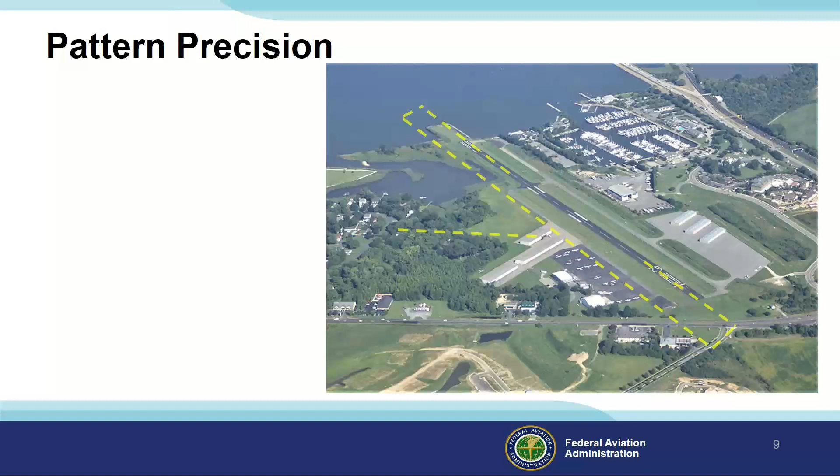So we're all familiar with the traffic pattern. This may not be exactly what it looks like, but represents the rectangular pattern that we usually end up using. It's an essential part of every flight, and sometimes what we do is we take just something as routine as the traffic pattern for granted. We don't want to be doing that.

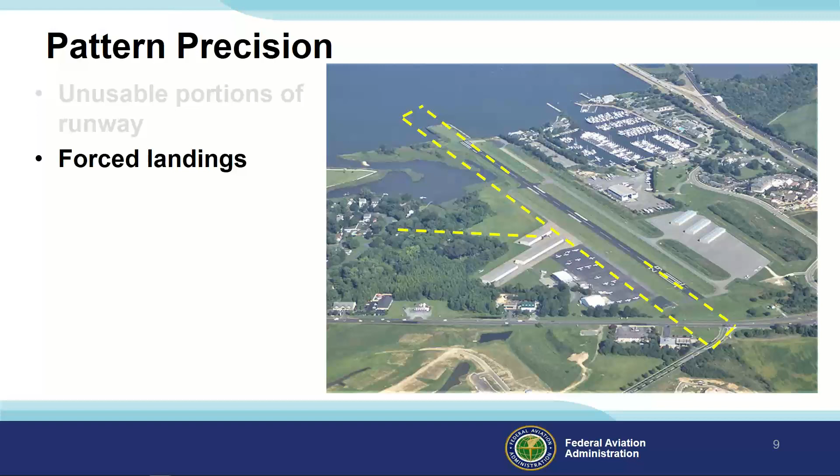Sometimes we have less distance available, sometimes we're working with many other aircraft in the area. Understanding what are the unusable portions and usable portions of a runway will help us if we're ever faced with that condition of forced landing, and getting precise in our flying, because that breeds confidence and, hey, it makes you look good for the other pilots. There are airports out there that they're holding up the scoreboard as you do land from time to time.

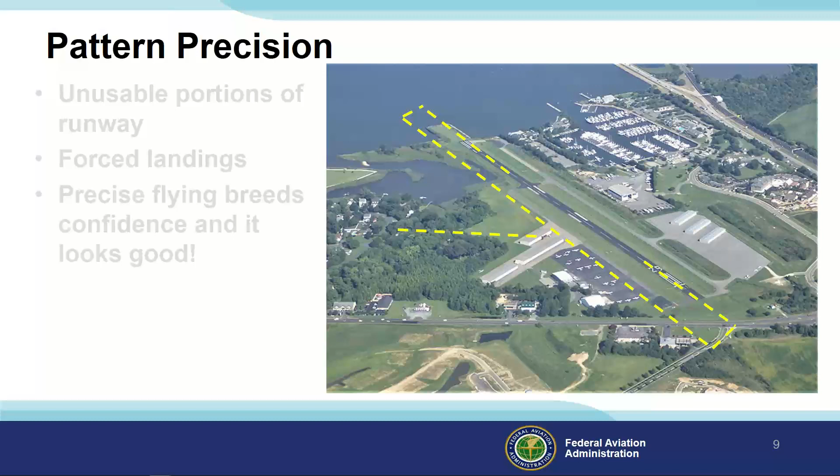Couple things to point out, to think about: if you're calling on the common traffic advisory frequency, you want to use the name you find on the chart and also on the chart supplement, Hancock County, Bar Harbor. That does help out because occasionally we end up with airports with near similar names, or this happens in multiple places around the country where you have two airports basically in the same town, but on other sides of town. The last thing you want is a situation where, say, Sanford is called for both airports and people don't know which one.

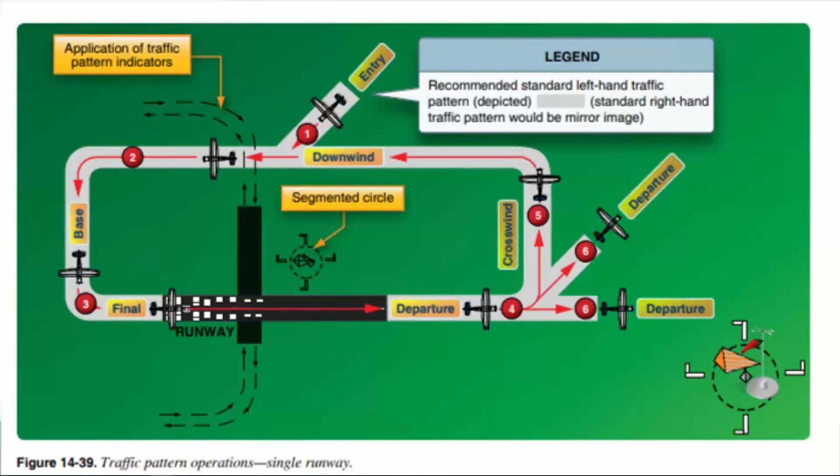In the Aeronautical Information Manual, you'll have the classic black and white picture. It looks basically just about the same, except they end up showing numbers versus putting the words right on it.

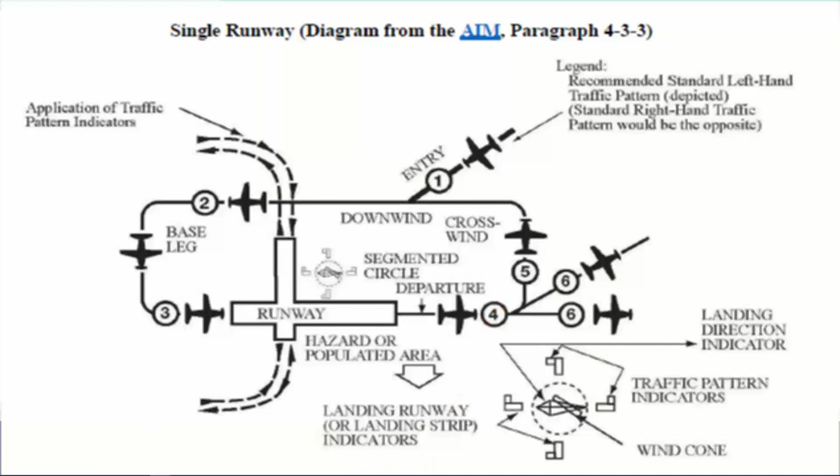You want to think about the dramatic differences in traffic patterns. This year I was listening to some stuff about people flying back to Oshkosh, which operates a certain way. The busiest airports operation-wise have a traffic pattern, and if you own your own little farm field that only you fly in and out of, you have a traffic pattern too. But recognize that most airports we all fly at lie somewhere in between these two extremes. So you don't want to treat every airport like Oshkosh, and you don't want to treat every airport like your own little personal farm field.

With tower controlled airports, you got to remember 91-123, compliance with ATC clearances and instructions. For non-towered, you have to remember 91-126, operations in Class G airspace. Believe it or not, look at the reg - it even talks about operating at an airport with an operating control tower in Class G. It has happened; it does happen from time to time. Look at the regulations following that too: 91-127, 129, 130.

You'll notice paragraph A of each of those regulations builds upon the previous reg. So 91-127 is for Class E, and it says you must do everything in 91-126.

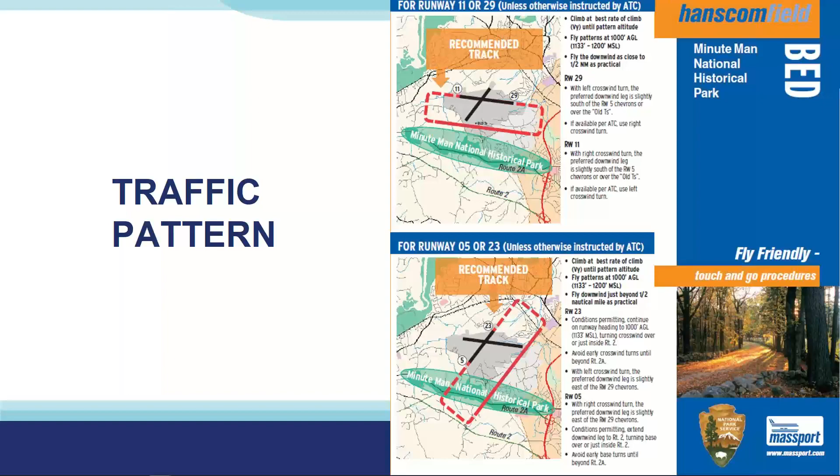And even other smaller airports can set things up a little bit differently. Another home airport of mine, I get a few of them out here in New England now, is Franconia, where you have both gliders and powered aircraft.

And then to help separate that, if you look at the chart for that airport, you'll notice this little asterisk, IP, or RP, excuse me, if I can get it flashing there for you, just to highlight it. Airplanes all enter the traffic pattern from the other side of the runway, the east side, and use the standard 45-degree entry for both of them.

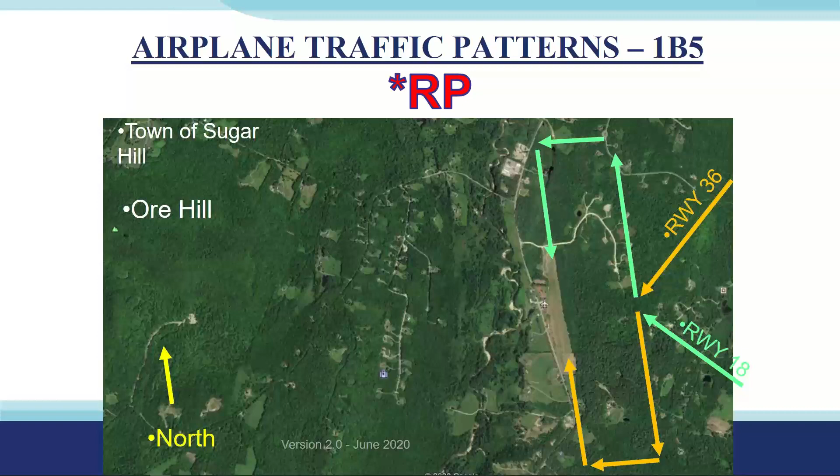However, for runway 36, they will end up doing a right-hand traffic pattern. And that just helps in keeping those different types of aircraft separated.

That's not what you want to do in the airplane, because actually what it does is degrade the safety, and you can definitely see it. All you have to do is listen to the traffic report on any of the Boston news stations, and sometimes out in the Hartford stations or Portland, Maine stations too, about how much the traffic is backed up because of fender benders and people having accidents and all of that.

What I want you to do is, instead of thinking about it and getting angry the way that some people do in their automobile, try to think about what you're doing, not only in the traffic pattern, but in everything. But in the traffic pattern, this holds even more so.

First and foremost, what you want to do is ask, is it safe? Is what you're doing increasing the safety for you and the others around you? You might think doing a right-hand traffic pattern is safer for you, but you may be degrading the safety for everybody else. That's first and foremost. Do what is safe, i.e. do what is right.

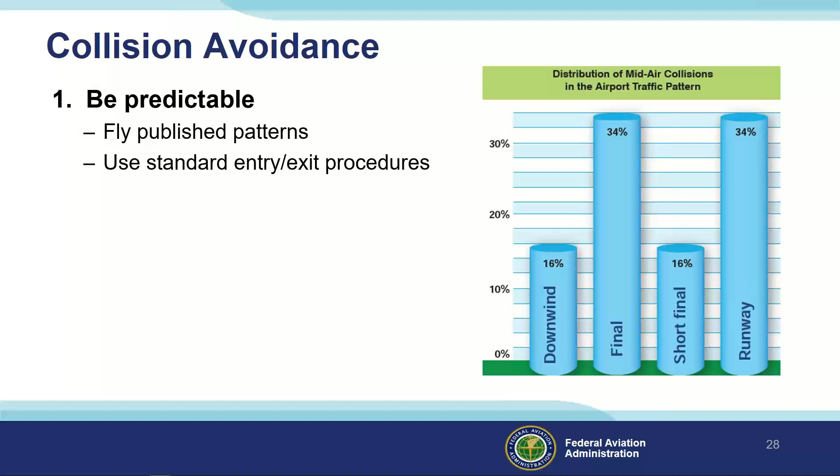Be aware, look and listen. If you're familiar with it, if you fly instrument wise, monitor maybe approach frequency if you have the capability and the bandwidth to be able to do that. If you are an instrument pilot approaching the airport, maybe instead of saying crossing Bayou at such and such, say at a 7-mile final or 7 miles to the northwest of the airport, so that other pilots will understand that a little bit better.

And be proactive. Announce your position and your intentions of what you're doing. In fact, this is something you're not going to see in the advisory circular, but I've picked it up, and I tend to do this on both my high-end flying and my low-end flying, i.e., if you're flying in a jet in a crew environment, or if I'm flying my glider, just out there for fun, because both of these are there. But if I'm coming to an airport in a crew environment, I might actually jump on quickly or ask the other pilot to jump on the common traffic advisory frequency when we're 10 or 15 minutes out, and just advise,

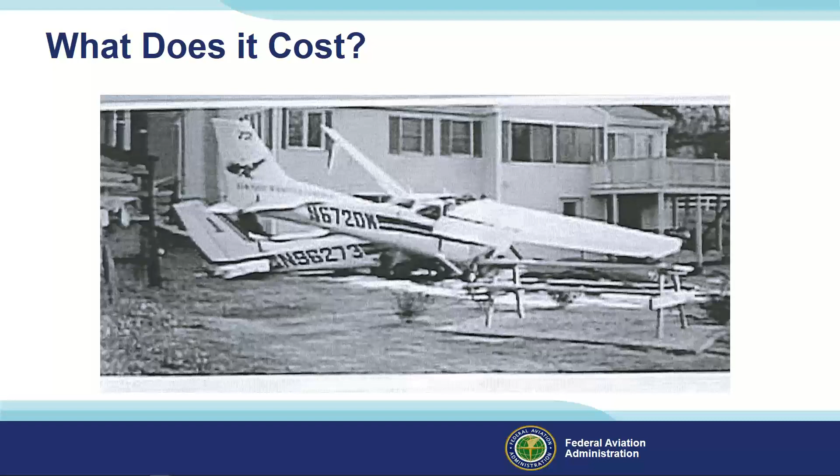Here's what the NTSB found in relation to it: the student pilot's failure to see and avoid the private pilot's airplane, the student pilot's non-standard traffic pattern entry - though there was no direct evidence of it, there had been an issue at that airport because many instructors and students had been entering the traffic pattern in a right-hand pattern prior to that - and the private pilot's failure to check for other traffic before turning on final, given the position of the sun.

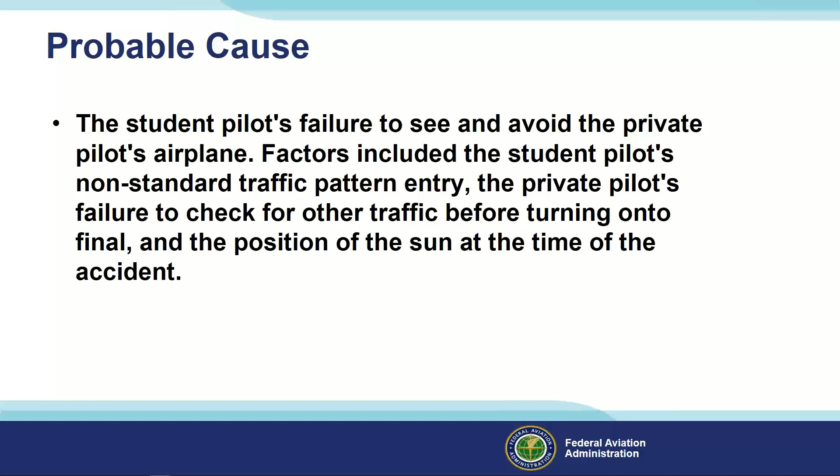But who's really at fault? Who knows? But it did end up costing a lot, and it ended up costing somebody who was looking forward to a promising career in aviation, who ultimately, I think, ended up getting out of it. And there were even some other cases - this was a horrific one I dealt with.

It happened right in front of me as I was flying. A couple aircraft ended up lost - a fellow instructor I worked with, along with two of his students, with it. Basically two aircraft on final, both flying the traffic pattern, and one clipped the tail off the other one, killing all three.

And all the NTSB had to say was failure of both pilots of both aircraft to see and avoid. You've got to remember, in society the problem with this is if you survive the accident and the other person doesn't, you're going to be viewed by society as being in the wrong, even if you were right - i.e., if it was the other person's fault.

We've even seen some of this recently. Thankfully, knock on wood, nobody was hurt or killed in this accident, but a horrific accident between a Cirrus and this Metroliner at a tower-controlled airport.

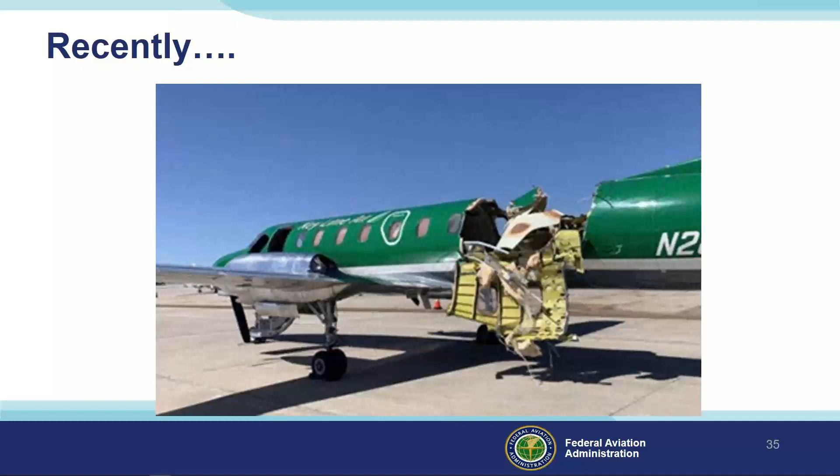When this did occur, it does appear - I think it's in the preliminary that recently came out - that one aircraft overshot the final and ended up colliding with another one. What I go back to there is, are you operating safely?

So if we break some of this down, the right-of-way rules - the exception we have in regulation is landing. Aircraft on final approach to land, while landing, have the right of way over other aircraft in flight or operating on the surface, except they shall not take advantage of this rule to force an aircraft off the runway. I.e., if you're on the runway, you own it.

You may hear that from air traffic controllers. But also look - this is some of the legalese aspect to it - it says nothing about a low approach. If you're out there maybe doing some practice instrument flying or whatever, it's if you're intending to land, not if you're planning on doing a low approach.

And this is one of the things we end up seeing. What it comes down to is really the spacing is incumbent upon you, not the other pilot. You can courteously work it out amongst yourselves - that's what a common traffic advisory frequency is for. But you are the one that has to maintain the spacing from the other aircraft. You don't have the other one maintaining the spacing for you.

And of course, when two or more aircraft are approaching for the purpose of landing, the aircraft at the lower altitude has the right of way, but shall not take advantage of it.

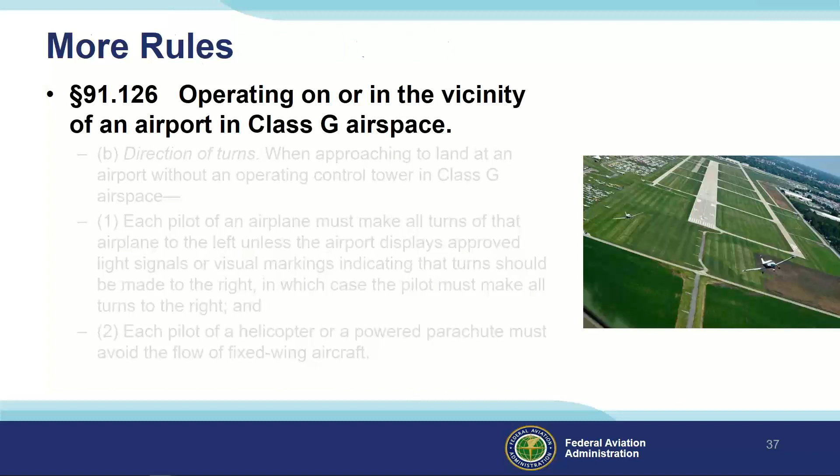And correct me if I'm wrong, John, I know you've talked to the airport manager a lot lately - isn't this something they're going to be redoing at Bar Harbor this summer? Construction? Yeah, they are. You're correct, Steve.

From what he told me, they've already placed the order for a new segmented circle to go in there that will have the little dog legs on it, just so there's no question in anybody's mind. Yeah, the ICAO standard is not to have them unless it is a right-hand traffic pattern.

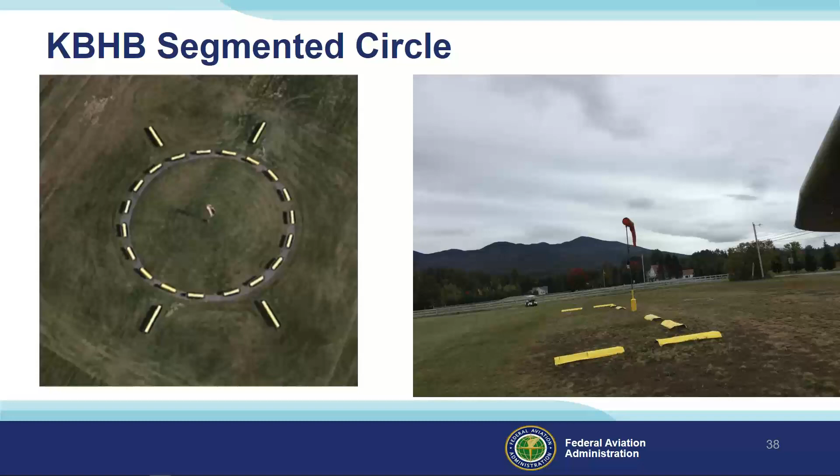One thing that is a little bit different here is that 91-126 and 91-127 do not specifically mention the minimum altitude for the traffic pattern of a turbine-powered aircraft, whereas 91-129 does - that a turbine-powered aircraft, turbojet, needs to maintain at or above 1,500 feet AGL until it's in a continuous descent to landing. Most jet operators will do the same thing at airports in Class Echo and Class Gulf, even if it's not indicated by the airport manager or the chart supplement, just to provide that extra spacing.

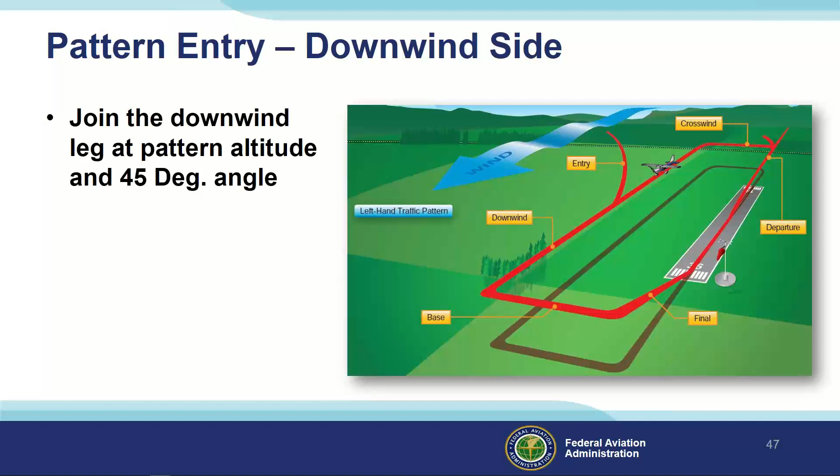The standard pattern entry is on the downwind side of the 45, but in the advisory circular you'll see other descriptions, like flying over and descending well away from the traffic pattern. I use 2 miles at least as a minimum myself, descend to the traffic pattern and enter. Cross over 500 feet above it, fly clear, turn onto the 45, and establish.

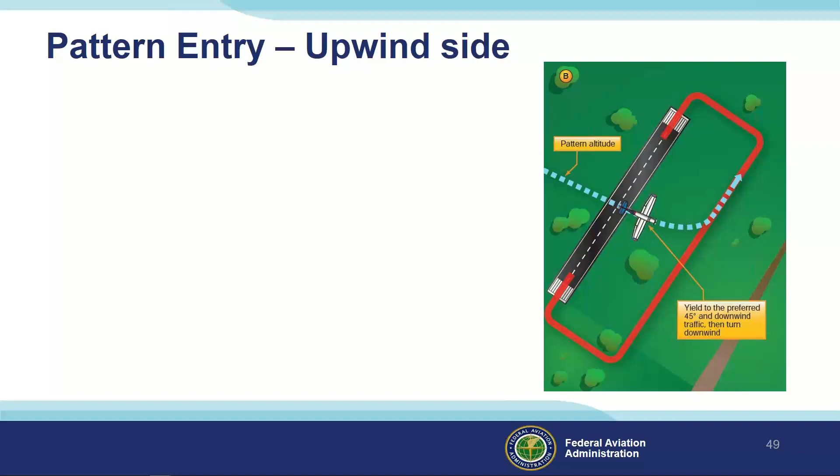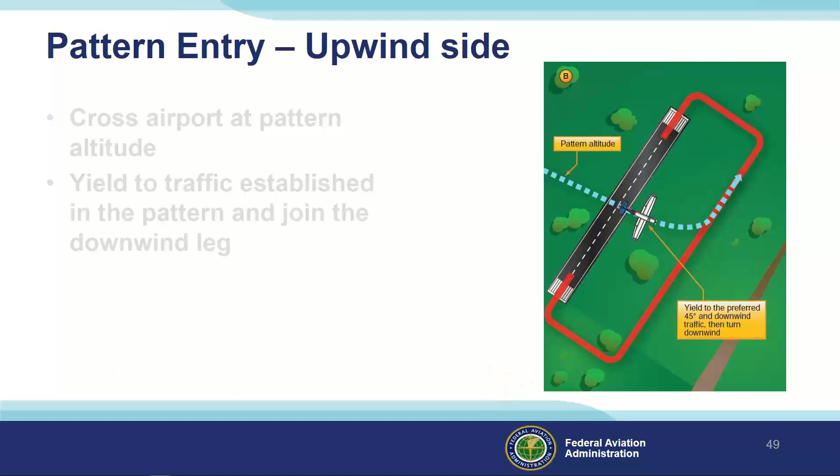There's also a recommended entry on the upwind side, which is a way Canada has been doing it for years when approaching the airport from the opposite side. The US is now picking up on this: cross at traffic pattern altitude, yield, and join the downwind leg. I will admit I've been known to do a bit more, instead of flying directly over the airport, to give more spacing and more time to join a bit further up.

What's interesting, if you think about New England, everybody arrives at the airports from the southwest and departs to the southwest, it really seems. If you look at the traffic flow, because we're tucked way up in that northeast corner, everybody's coming in from the southwest and ultimately departing to the southwest. I think the only exception to that is Nantucket out there.

With students, if you use paper charts, here's a little thing I used to do with them to help them understand how to establish, instead of flying directly over an airport where there may be other aircraft, parachutists, and all of that. If they know what the wind is, or can do it for multiple runways, I'd have them mark it like this: just draw an extended line at a 45-degree angle off the runway and go 4 or 5 miles out, find some prominent point you can fly over, and mark it in pencil—runway 22, and up here runway 4, up by this tower where there's an intersection with a river and stuff like that.

Now if you're coming to this airport from far away and they're using runway 22, instead of going over the airport, circling around trying to figure it out—as a student learning how to get set up—if you're out here, runway 22, you just fly straight to this point. Then if I turn directly at the airport, I'm basically set up on a terrific little 45-degree leg.

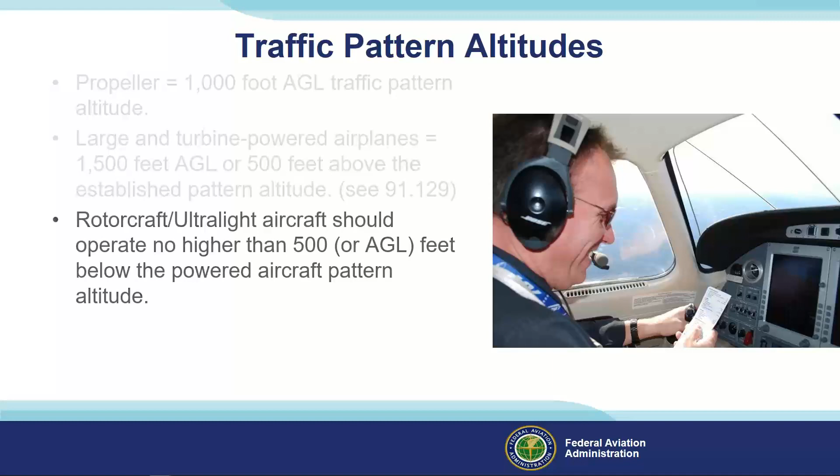Traffic pattern altitudes do vary. Propeller-driven aircraft are typically 1,000 feet AGL. Large and turbine-powered airplanes, as I mentioned, are normally 1,500 feet AGL, or 500 feet above the established traffic pattern—that's with regulation 91.129. Rotorcraft and ultralight should operate no higher than 500 feet AGL below the powered aircraft pattern altitude.

Not all aircraft or all airports are the same. Here in New England, you don't see, like you do down in Florida, a lot of 800-foot traffic patterns. That was an old standard many, many years ago before I even started flying, but for some reason it got held over in the flat country of Florida, so there's still a lot down there.

But check out Whitefield, New Hampshire. Take a look at what it has in the chart supplement for the traffic pattern altitude, and then take a look at the sectional—start thinking about it, and you'll understand why. Another interesting one in New Hampshire, in New England, is Portsmouth, Pease, Papa Sierra Mike—take a look at that one. Whitefield is Hotel India Echo, and Pease, Portsmouth, is Papa Sierra Mike.

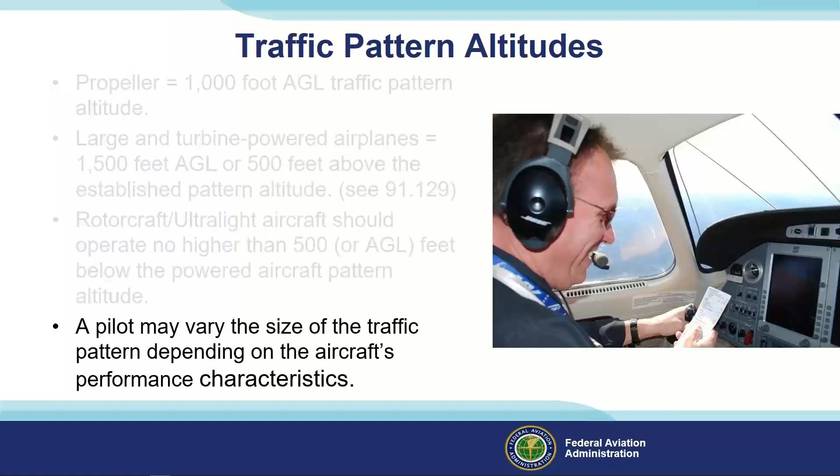Also recognize a pilot may vary the size of the traffic pattern depending upon the aircraft's performance characteristics. That's kind of almost a given.

Now, if we talk about straight-in approaches, VFR or IFR, by regulation, technically who's on final has the right of way, but there's no distance limit. There have been cases where 4 mile-long final approaches have been considered not established on final, people taking advantage of the rules associated with it.

The advisory circular gives you some suggestions, but remember the right of way only matters when there's a conflict. Everybody has the responsibility for see and avoid.

If somebody else is doing straight-in approaches, things you can do, if you've decided it is your best option in the interest of safety, legality, and courtesy, is the lights on before turning base? Check visually, electronically maybe, but don't keep your head buried in the screen. Be looking outside.

Extending your downwind might be safer. I have been known to adjust the speed that I fly a traffic pattern at operations like Bedford, where many jets are coming in. We'll ask the tower controller, you want me to give you extra time and slow it up? Oh, that'd be great. You can be courteous.

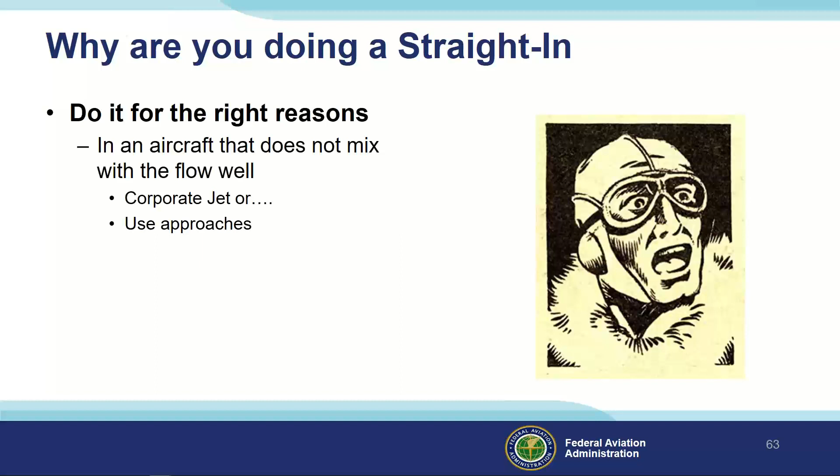If it's a corporate jet that I'm going into at an airport like Bar Harbor, especially if I've never been there, I'm probably going to do a straight-in approach using the approaches, but I'll do some other things like maybe call 10 or 15 minutes out just to give everybody a heads up, planning to do the ILS runway 22. I'm probably going to make some extra calls to try to give people the opportunity to mix in well with the jet. That brings me to a couple scenarios we have here, a couple poll questions for tonight.

So I'm going to go ahead and open up that poll question. I'll launch that. Let's see what you think. There is no specific right answer to this. We have about 90 people out there joining us.